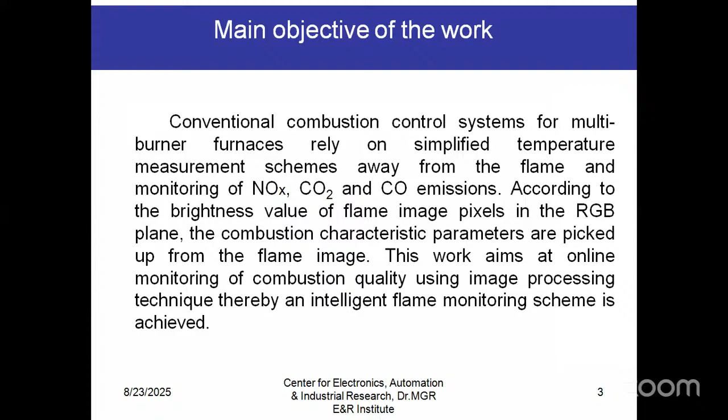We talk about the combustion characteristics. Based on the combustion characteristics, we infer the flue gas emissions and the flame temperature. This work will enable you to automate the monitoring of combustion quality using image processing techniques and an intelligent flame monitoring scheme.

What is the motivation? The main motivation is to ensure complete combustion. How do we go about that? I need to adjust the air to fuel ratio. The nominal value of the air to fuel ratio in a thermal power plant is 4:1, that is 4 parts of air to 1 part of fuel. So I must ensure complete combustion by adjusting this ratio.

This is done manually, there is no automated system. The air fuel ratio has some variation. The process engineer has to give a command to adjust the supply of fuel and air. So this is what is happening.

In the case of incomplete combustion, this can be identified by looking into the flame color. Actually, complete combustion and incomplete or partial combustion can be identified by looking at the flame color. So now I need to monitor the flame color.

When there is variation in the flame color: if it is whitish to yellow, you can say the combustion is complete. If somewhat reddish, it is partial combustion. And if the flame color is blackish, the combustion is incomplete. The flame appears blackish because of the presence of unburnt carbon.

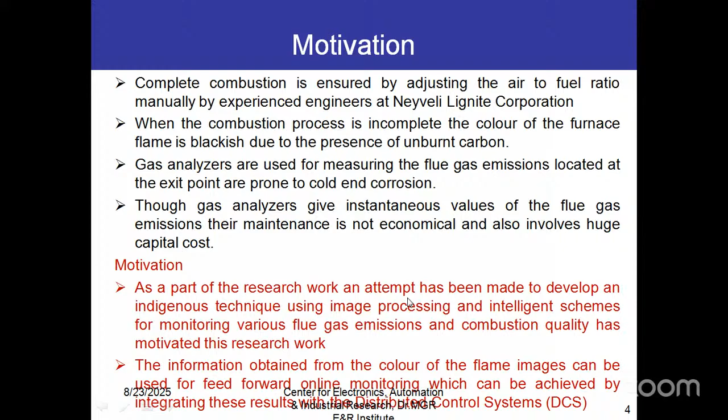Coming to the next slide, based on the literature survey done, people have worked extensively on this area. They are using soft sensors for measuring nitrogen oxides and oxygen using genetic algorithms, and they are using pattern characterization for the combustion flame so that they can estimate the combustion quality.

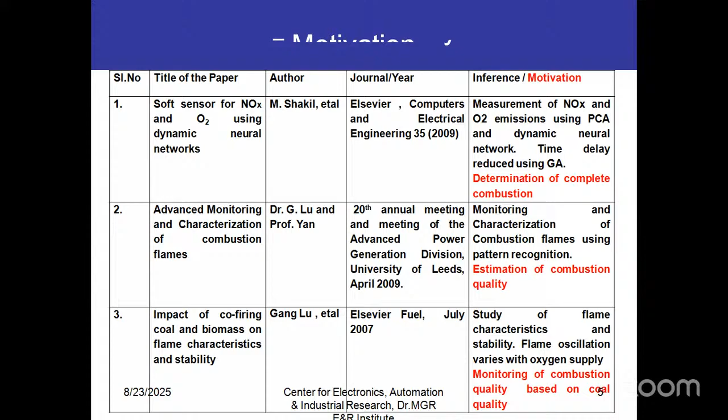People are also studying flame stability characteristics—the flame flicker. This flame flicker varies with respect to the oxygen supply. If the air fuel ratio is 4:1, the flame will burn stably. But if the oxygen content is less or high, there will be oscillations in the flame, and when there is flame oscillation, the combustion quality will be reduced. This flame oscillation and stability will once again depend on the coal quality given as input for firing.

Some people have used a hidden Markov model to identify combustion quality, along with three-dimensional visualization patterns. Using the back projection method, they try to reconstruct the 3D model of the flame, and from that they find the luminosity and infer the combustion quality.

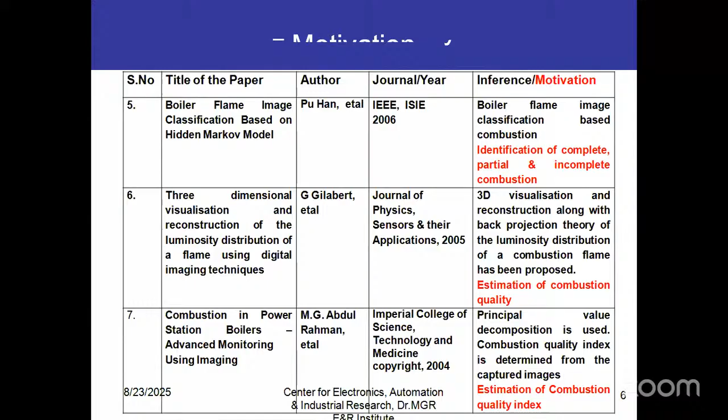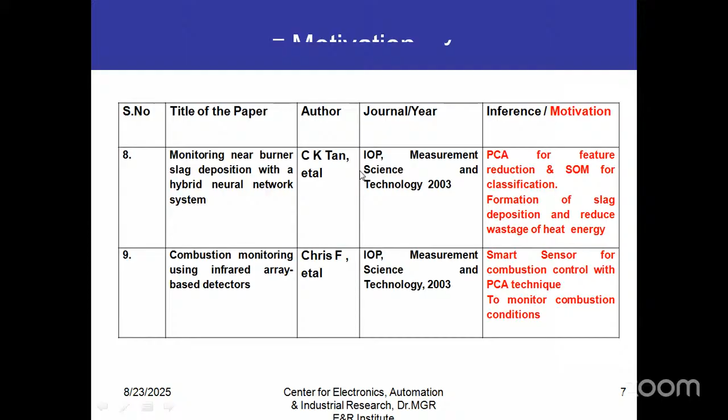Similarly, people are using principal component analysis to determine the combustion quality index from the flame image. Principal component analysis can be used for reducing features, and you can use a hybrid neural network system for classifying the quality of combustion. In the last paper, they are using a smart sensor system for combustion quality control using principal component analysis.

Before the pulverizer, you have grinding mills, which grind the uneven lumps of coal into fine powder. Since the coal is taken from the Earth's surface, it contains some metallic components, which need to be removed—you require only pure coal dust for combustion in the furnace. So the powdered coal is passed through a precipitator containing an electromagnetic field, wherein the magnetic field attracts all the iron particles, leaving the coal dust, which is a non-magnetic material, behind.

If you are using lumps of coal and directly dump them into the burner, the required amount of calorific value will not be attained, and burning of uneven coal lumps will take longer time. But if you use a pulverized coal mixture, the burning process takes place easily, and the firing process is very easy.

Combustion is defined as the process of burning fuel in the presence of oxygen. So you mix the coal with air and supply it to the furnace, and in the furnace you set the firing. Initially the firing is done using heavy oil, and subsequently the firing is taken over by the coal.

Once the coal is burnt completely, a lot of heat energy is generated. The preheated water inside the boiler gets heated by this energy and converted to superheated steam, at a temperature of around 540 degrees centigrade. This steam is used for driving the turbine coupled to the generator.

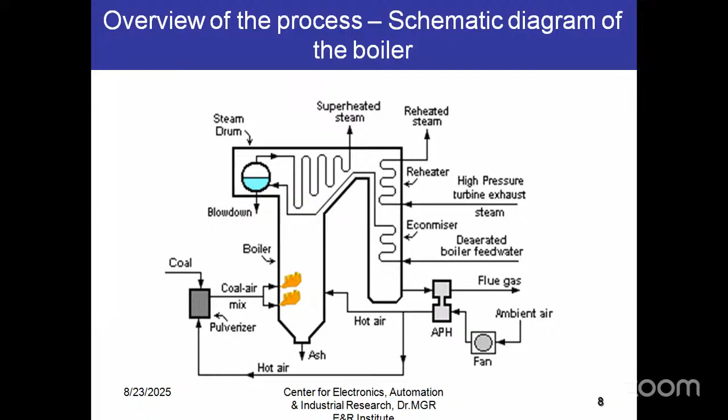By placing cameras, you can monitor the quality of combustion at the furnace level itself, ensuring complete combustion so that you can minimize flue gas emissions. This is the chemistry behind the combustion.

Now I'm mixing air with the coal, fuel and air are mixed. Fuel contains carbon, sulfur, nitrogen, and you have oxygen and nitrogen in air. This air combines with the fuel and is burnt, releasing heat energy as output. Oxygen combines with carbon and hydrogen forming carbon dioxide, carbon monoxide; nitrogen and sulfur combine with oxygen forming oxides of nitrogen and oxides of sulfur. This is the chemistry behind the formation of flue gases.

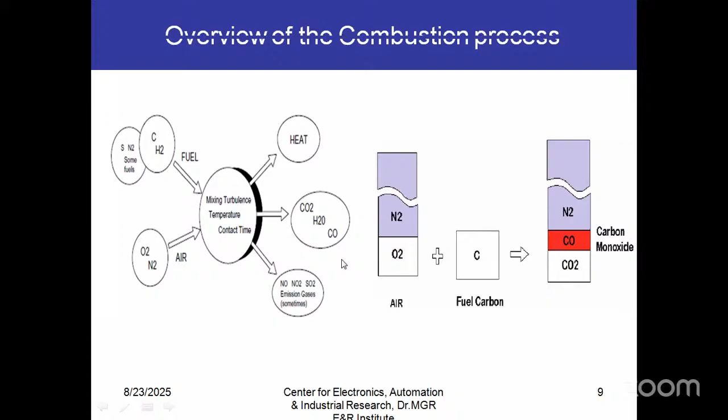This flue gas is to be minimized by looking into the flame color, so that we can ensure complete combustion. This is how we are trying to automate the industrial process, providing smart technology for minimizing flue gas emissions and ensuring complete combustion to achieve maximum power generation.

For doing this project, we approached Neyveli Lignite Corporation. If you see their specifications, the boiler capacity is around 690 tons per hour, and the fuel used is heavy oil and lignite. There are totally 6 mills grinding the coal.

The firing system followed is called the tangential firing system, and there are 2 units, each having a capacity of 210 megawatts generation. The superheated steam temperature is nearly 540 degrees centigrade, and the total number of burners is 20.

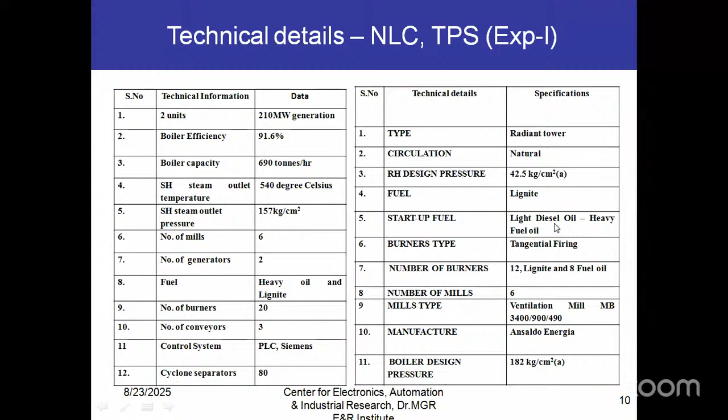There are 3 conveyor belts supplying the coal. Out of the 20 burners, 12 burners are for lignite, meaning coal, and the remaining 8 burners supply oil for initial firing. There are totally 6 mills, and the startup fuel used is heavy oil, which is light diesel oil.

This is the tangential firing system followed in the boiler. The entire height of the boiler at Neyveli Lignite Corporation is nearly 80 to 90 meters, and the entire firing process is completed between the 19th meter and the 21st meter of the boiler. At these 2 levels, the 6 mills are located.

You can see the 6 mills: A, B, C, D, E, and F. These mills are placed tangentially. OB stands for oil burner, and LB stands for lignite burner.

Then you have the BFD, burner flame detector. So you have one flame detector here, and you have the entry point for the lignite and oil. Then you can have additional air firing, that is AAF, which can be done to this point.

So like this, in the tangential manner, the system is arranged. Through the lignite burner, you supply the powdered lignite. Through the oil burner, you supply the heavy oil for initial firing. The burner flame detector captures the flame present in the furnace, and it displays the flame on the CCTV available at the control room.

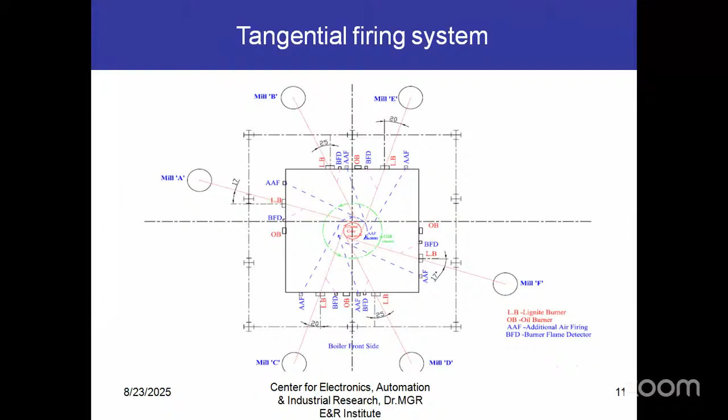This kind of firing takes place at two levels, that is the 17th, 19th meter and the 21st meter of the boiler. Now, for monitoring the flame inside the boiler, they are fixing infrared cameras, that is your burner flame detector. It is present at the 19th meter and the 21st meter, and it is being fixed to the walls of the boiler.

This infrared camera is perfectly cooled by a cooling system. It is placed inside a jacket. Inside the jacket, cooling water is circulated because the boiler temperature is very high. Actually, the flame temperature is very high, nearly 1250 degrees centigrade, so the camera will be affected by that.

So what you need to do is cool the camera. For cooling the camera, you provide a jacket outside the camera by which the cooling water is circulated, and you can change the orientation of the camera using some mechanism. There is a motor you can use, and this motor will adjust the orientation of the camera.

So currently, before this research, they were only using this camera for detecting the presence or absence of the flame. So only whether a flame is there or not.

Why they are using this system to detect the presence or absence of the flame is that you can't keep loading the furnace of the boiler without knowing the status of the flame. If you keep loading the furnace without knowing the flame status, the boiler will explode. The maximum capacity you can load the furnace is 690 tons per hour. That is the limit, you can't go beyond that.

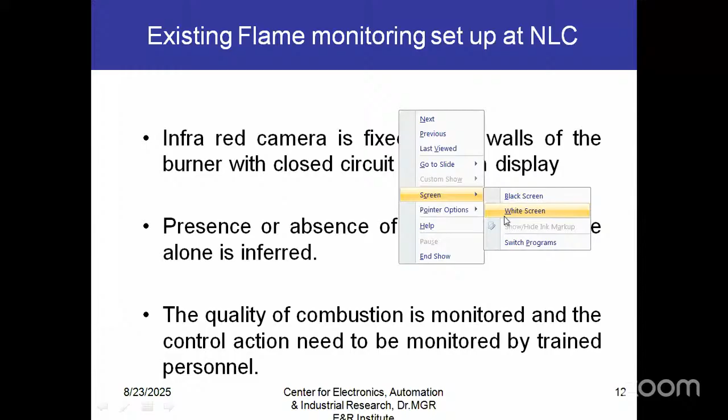For data gathering, you must be interacting with the trained personnel there so that you can offer the required control action with respect to the condition existing there.

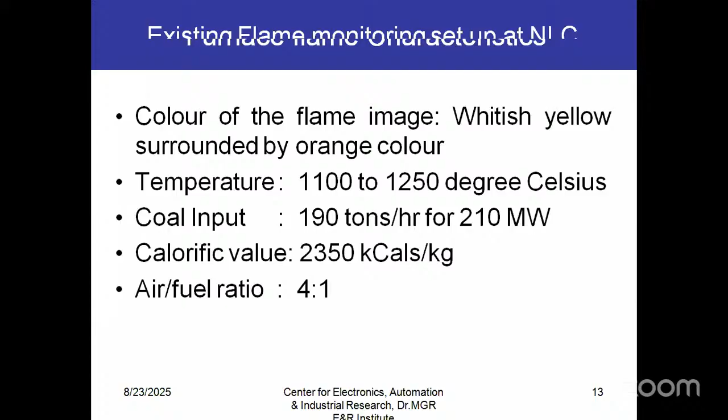So you see what the flame characteristics are. The color of the flame is going to be whitish yellow or orange. The temperature at the core of the fireball is nearly 1100 to 1250 degrees centigrade. The coal input is around 190 tons per hour for 210 megawatts, which is the capacity generation for one thermal power plant unit. The calorific value achieved is 2350 kilocalories per kg, and the air fuel ratio maintained is 4:1.

So in the existing setup, the infrared cameras are placed in a tangential manner to capture the flame. These infrared cameras take video of the flame and send it to the control room, whereby the process engineer will say whether the flame is there or not, and based on that they will be detecting and trying to say whether the flame is present or absent.

Based on that, they will say the flame is present or absent.

You can adjust the orientation of the camera using the servo motor mechanism, and the entire camera is cooled by circulating water through the cooling jacket, and whatever flame images are captured will be sent to the CRT monitor in the control room.

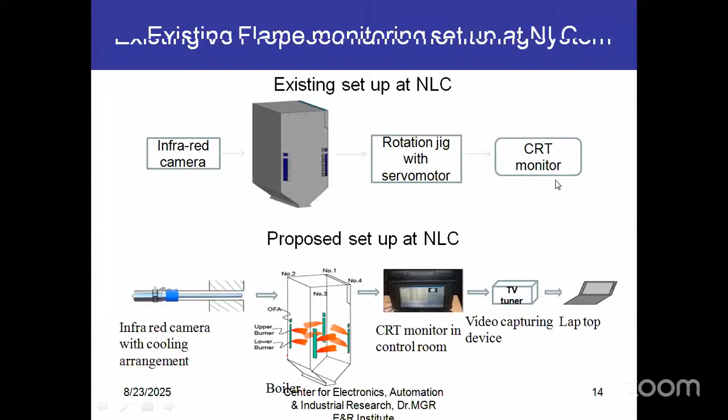But now what we are going to do is, whatever video is being captured on the CRT monitor has to be transferred to the PC, that is your personal computer or laptop, and in the laptop you can have your intelligent algorithms.

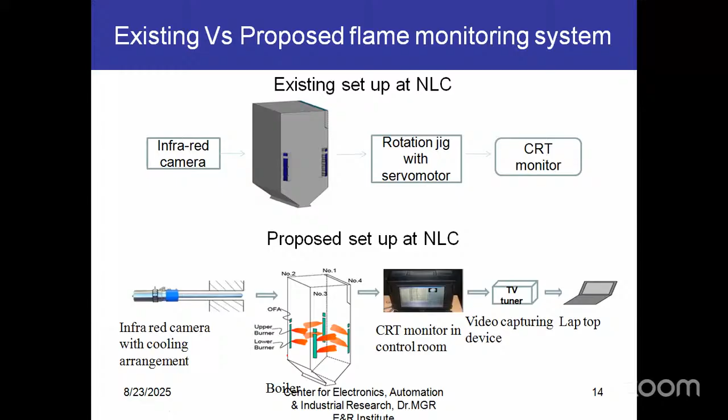You can process the flame images, and based on that you can say what is the quality of combustion and what will be the flue gas emissions. You can predict the flue gas emissions by looking into the color of the flame.

So this is the methodology that is being adopted. We are capturing the flame images, that is, the flame video is captured actually. So the flame video has to be converted into flame images.

So you are using a frame grabber to extract the flame images, and the flame images are pre-processed. Suppose any noise is there, it has to be pre-processed, the noise to be removed.

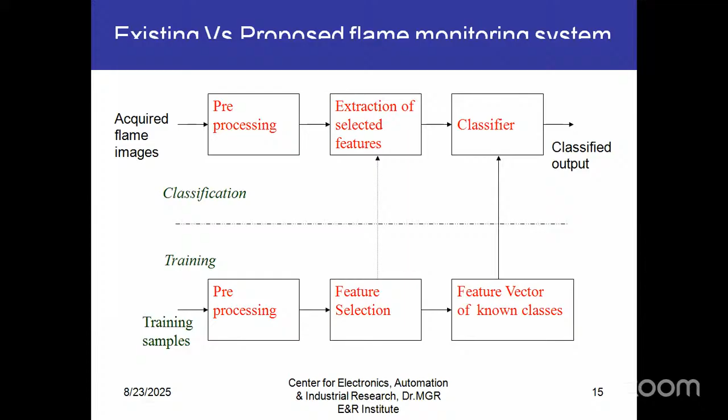After the noise removal, you try to extract the features from the flame image and give it to the classifier. Probably the classifier is an intelligent classifier, an AI which adopts some method of AI. Now when the features are given to the classifier, suppose you are extracting 100 features, you can give all 100 features to the classifier, but it will increase the computational complexity.

So what you can do is, during the training process, after extracting the features, you can go for feature selection. Which are the features which will enable the classifier to perform well? Those features alone can be given as input to the classifier, so that your classifier efficiency increases.

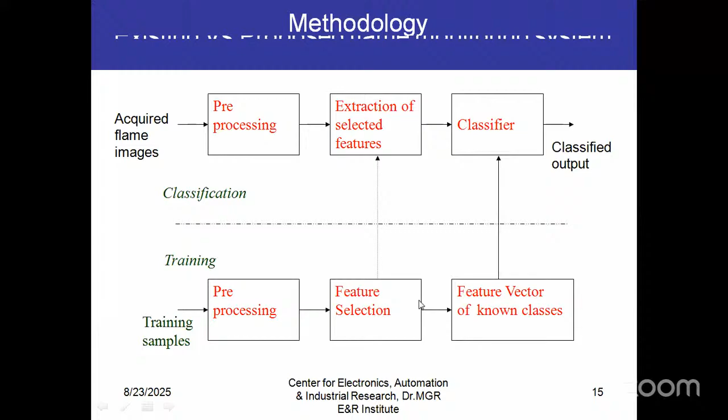So this is the general block diagram behind implementing the AI algorithms for flame monitoring.

So now what I have done is I have implemented the radial basis function network, back propagation algorithm, all this. So I am reading the flame images, and from that, features are extracted.

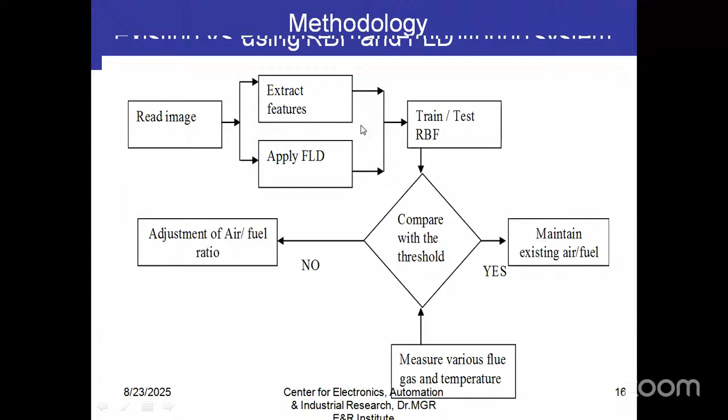For extracting the features, I'm using Fisher linear discriminant analysis. By using the FLD, I am trying to reduce the feature set. The reduced feature set is used for training the radial basis function network.

So the output of the radial basis function network will be compared with the threshold. If it is within the limits, if the variation is within the limits, then you can maintain the existing air fuel ratio, saying that the quality of combustion is complete.

In case if this air fuel ratio is not within the limits, then you have to go for adjusting the air to fuel ratio. At the same time, when you are comparing the threshold, you can also go for measuring the flue gas emissions and the temperature, which will say whether the combustion is complete or not.

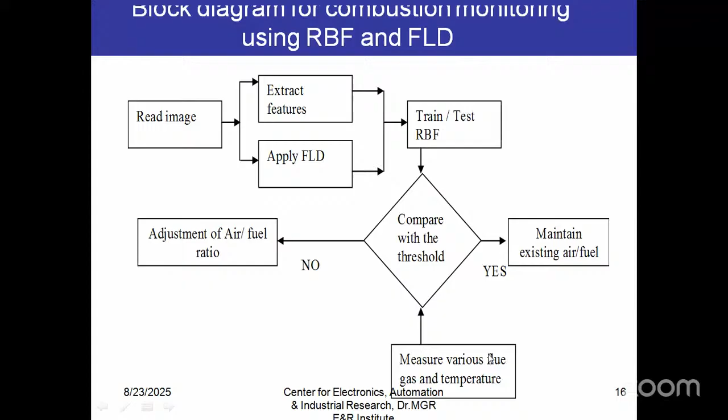So what are the steps that you need to follow? You have to collect the flame images. So we have taken the real-time flame images from Neyveli Lignite Corporation.

Then we are going to adapt some pre-processing methods. Actually, the image which we got is not a square image, so we go for square image extraction. Then we followed noise removal, and also edge detection and histogram analysis was carried out.

Then some features like area, average intensity, orientation, centroid, etc. were extracted. And then we tried with the classification schemes, both intelligent, that is AI schemes, as well as the conventional schemes, and we try to predict the combustion quality and the flue gas emissions.

So these are the flame images pertaining to the three categories. Class 1 corresponds to the complete combustion category, class 2 corresponds to partial combustion category, and class 3 corresponds to incomplete combustion category.

In the incomplete combustion category, you can see that the flame color is black, because of the presence of unburnt carbon. For complete combustion, it is yellowish and whitish, but for partial combustion, it is somewhat reddish.

So correspondingly, by capturing the flame images under these three categories, the flue gas emissions will be noted down by the measurements from the gas analyzer, and this will be formed as a lookup table.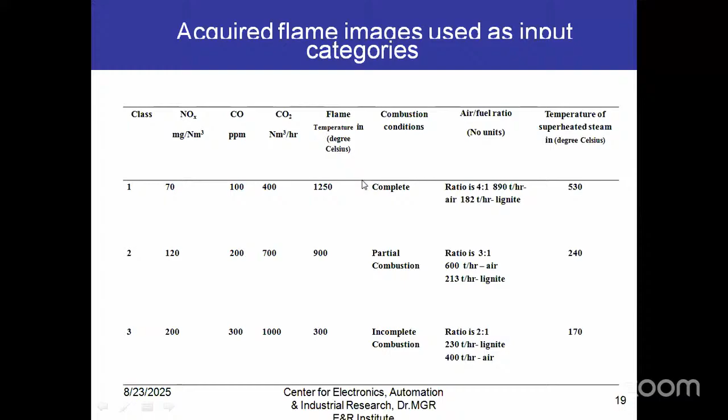Okay, now from the flame images, correspondingly we have captured the values of the flue gas emissions - NOx, CO, CO2, flame temperature - all this with the air fuel ratio. And at that time, the steam temperature was also measured. So with this table and the flame images, we start proceeding with our work.

The flame images, captured from the furnace of the boiler, pertain to three different combustion conditions. The size of the original image taken is 47 by 35, and we have gone in for square image extraction, that is 30 by 30.

This was done to determine which 30 by 30 portion to use. For that, a histogram analysis was done to find out which portion of the image can be used, and if any noise is there, you can use median filtering to remove the noise.

Edge detection was also done for all three groups of images - class 1, class 2, class 3. Class 1 corresponds to complete combustion, class 2 corresponds to partial, and class 3 to incomplete.

You see the majority of the flame is whitish or yellowish in class 1. In class 2, nearly 70% is blackish. And in class 3, almost 95 to 97% it is fully black.

And we have tested various filtering techniques - variance filter, minimum filter, mean filter, median filter. Out of all the filters, we found that the median filter was able to give the peak signal to noise ratio at an optimum range of 63 dB.

Now we have done the combustion histogram analysis to find out the range, minimum value and maximum value of the pixel range. In the complete combustion category, the minimum pixel intensity value is 120, and the maximum intensity value is 255.

In the partial combustion category, the minimum intensity value is 31, maximum is 255. So the count of the number of pixels corresponding to 255 will be less. But in the case of complete combustion category, the number of pixels corresponding to the intensity of 255 will be many in number.

So if you take the mode for 255, it is 67,368. Whereas for the partial combustion, it is only 60,934.

Similarly, for the incomplete combustion towards the intensity of 255, there are no pixels at all. So the minimum value is 0 and the maximum value of the intensity itself is only 75.

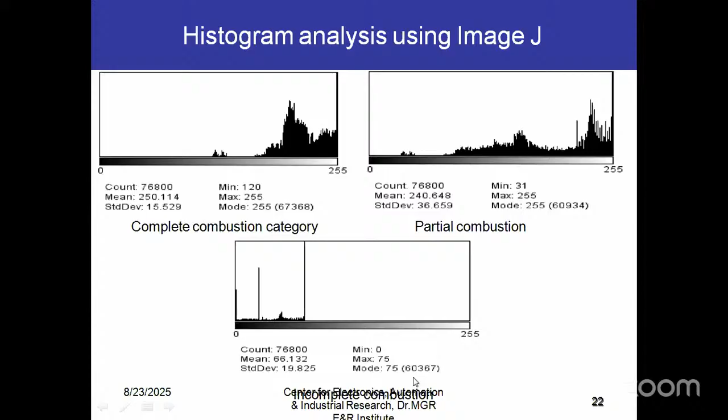You see only the mode for the 75 - the mode is computed only for the intensity value 75. So the pixel values in the range of 75 are having a mode of 60,367.

Now a surface plot has been carried out. From the surface plot, we are able to find out that the maximum portion of the surface is towards 255 for the complete combustion category.

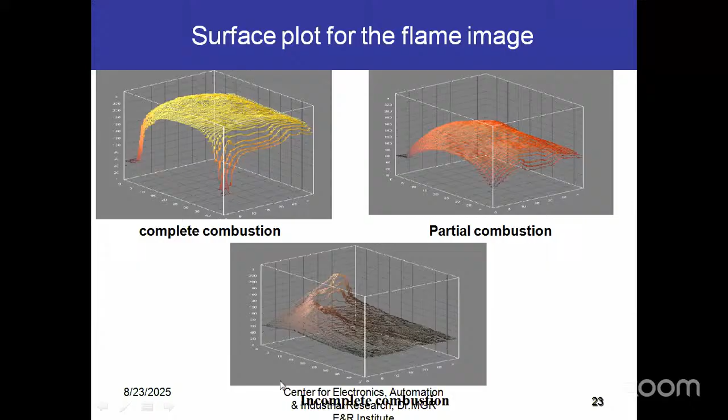For the partial combustion category, the entire surface is somewhere in the middle range of nearly 160, 170 and so on. And for incomplete combustion, the entire surface falls in the range of 0 to 75.

Now we can go for computing the features. So we are taking the average intensity value, area of the high temperature flame - which portion of the flame is having high temperature, that area alone is considered. Then centroid of the flame about the x direction and centroid of the flame about y direction, and orientation.

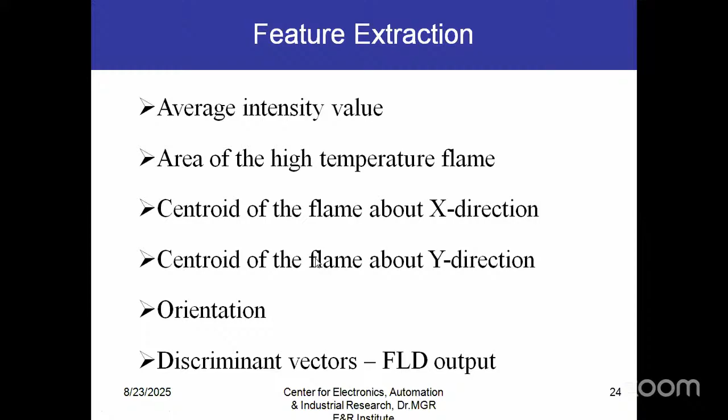So we have collected almost 51 images pertaining to 3 categories. We computed the average intensity. For computing the average intensity, you have to first find out the average of the gray level of the pixels in the flame.

Then you have to apply the first threshold value. You find the brightness of the flame. Then after computing the brightness of the entire flame, you try to compute the brightness of the high temperature region in the flame.

For that, you find out what is the average gray level of all the pixels, and you have to divide that value by the second threshold value. Then you compute what is the area of the high temperature flame.

So you find the summation of the brightness of all the pixels minus the threshold to get the area of the high temperature flame. Then you find the rate area of high temperature flame using this formula, and you can stop the process of feature extraction.

Once feature extraction is done, you go for FLD because you want the discriminant vectors from the FLD. For computing the FLD, you read all the 51 images. You have to find the eigenvectors, and locate the diagonal values which correspond to very high values.

Then you are finding the class mean. That is, when I say you are having 3 classes, class 1, class 2, class 3, for each class you are finding the mean value. Then you are finding the global mean, that is one common mean for all these 3 classes.

Then you try to find the within-class mean. That is, what is the mean within class 1, what is the mean within class 2, what is the mean within class 3. So when I say class 1, class 2, class 3, it corresponds to

complete combustion, incomplete combustion, and partial combustion. Then, after computing all these means, you compute the discriminant vectors phi1 and phi2, which will serve as 2 more features apart from the average intensity, high temperature flame, centroid X, centroid Y, orientation. Apart from that, you add two discriminant vectors obtained from this FLD analysis, and this will be given as the input to the classifier.

Now, when you are doing the FLD analysis, you can see that it is also done to find whether any overlapping between the images is there, because when the flame is burning, the transition will be from complete to partial and partial to incomplete. When that is the case, during the capturing of images, some partial images would have been mixed up with the complete combustion category and incomplete combustion category. If that is the case, you have to eliminate all that, then only your classification efficiency will improve.

So for that, we have computed the centers for class 1, class 2, class 3 from FLD analysis to see that any overlapping between them is there. But when you have carried out the computation for the centers using FLD analysis—

that is, actually the size of the image is 47 cross 35, and in that you are only taking 30 cross 30. So you have tried this for various 30 cross 30 combinations and computed the centers for class 1, class 2, class 3 using the FLD analysis.

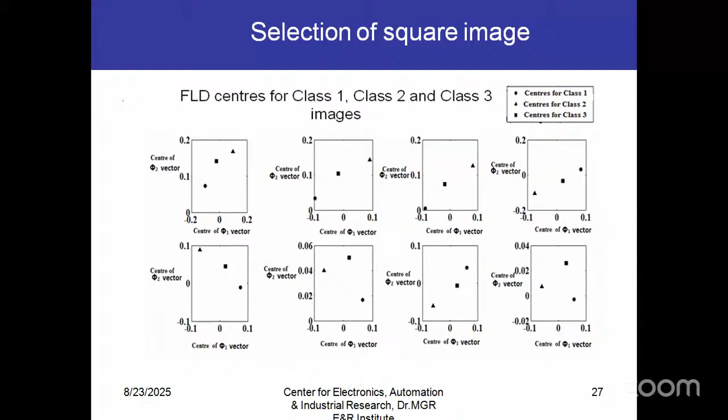And in all the cases, you found that there is a distinct separation between the class 1, class 2, class 3 images, which states that you can take any 30 cross 30 size of the image for further analysis. So now the flame image which you are capturing is a color image actually.

So you have to do the analysis in the three planes. A color image will have intensity in R plane, G plane, B plane. All this put together constitutes a pixel value. So in which plane can you do the analysis?

From these three figures, you can see that in the R plane, if I do the analysis, it will be efficient. Why? Because group 3 is grouped together, group 1 is grouped together, and group 2 is also grouped together, except only two images.

In the G plane, it is also somewhat efficient. All the group 3 images are together, group 2 images are together, and group 1 images are together. But B plane is not suitable.

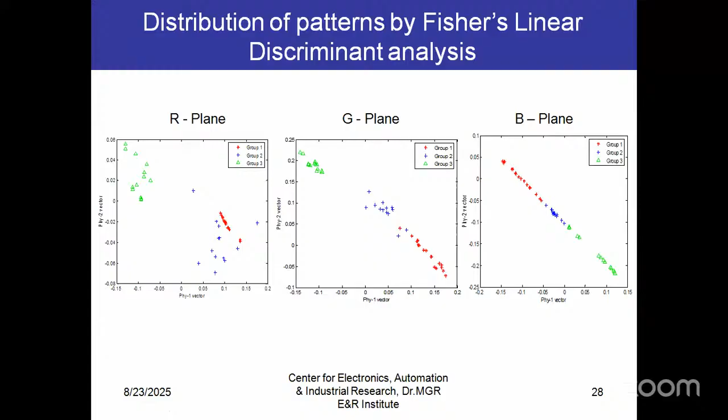So you can do your analysis either by combining the intensity values in R plane and G plane, or you can separately take the intensity values in R and G plane and do further processing. So by extracting the features, we went in for the conventional classification, the Euclidean distance classifier, which we tried first. When using the Euclidean distance classifier, the number of misclassifications was very high.

That too in the third category, which corresponds to incomplete combustion. The second category, partial combustion, the number of misclassifications are very high, 17 and 8. So our aim is to predict the incomplete combustion and the partial combustion, and offer the required control action. By using the Euclidean distance classifier, the classification is not up to the mark.

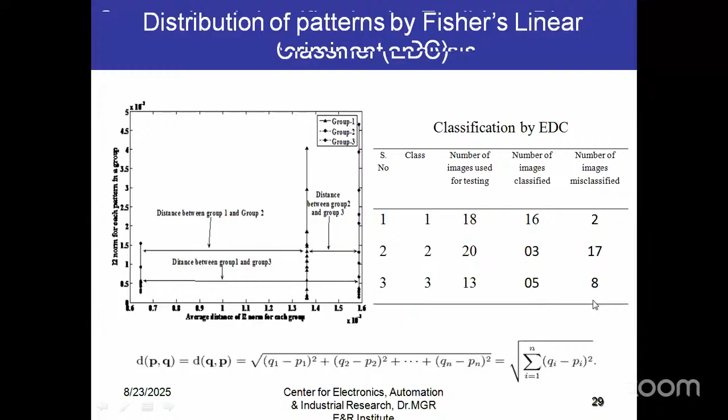The misclassifications are very high in number, so we move on to the intelligent classifier techniques. Take the Fisher linear discriminant analysis also. In this case also, three images are getting mixed up. In category 1, one image is misclassified, and in category 2, two images. Category 1 is complete combustion, category 2 is partial combustion. So three images are misclassified.

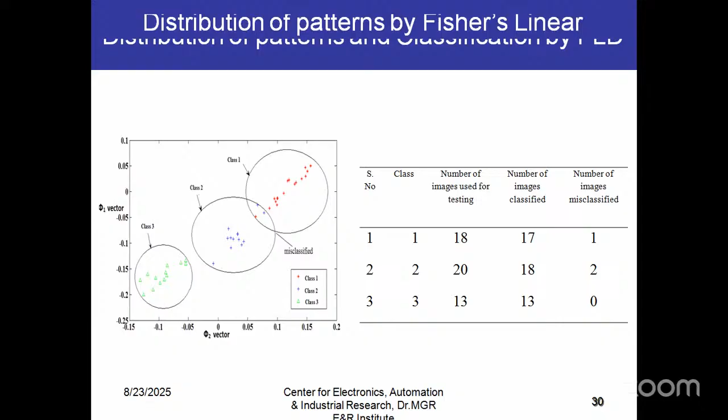That is why we are using the discriminant vectors of the FLD analysis as two features for training our intelligent classifiers. These discriminant vectors are dependent on the within-class mean and between-class mean and so on. Now we are proposing the feed forward network, that is the radial basis function network, first.

We have taken 7 nodes in the input layer, 48 nodes in the hidden layer, and 6 nodes in the output layer. Number of training patterns used was 51, and during the training process, a mean squared error of 0.033 was achieved. We are using a Gaussian function as the activation function in the hidden layer and a linear activation function in the output layer.

7 features were used as input to the RBF. What are the 7 features? Area, average intensity, area through the equation (the high temperature flame we computed), centroid X, centroid Y, the rate area of high temperature flame, and orientation. These are the 7 features which we have taken.

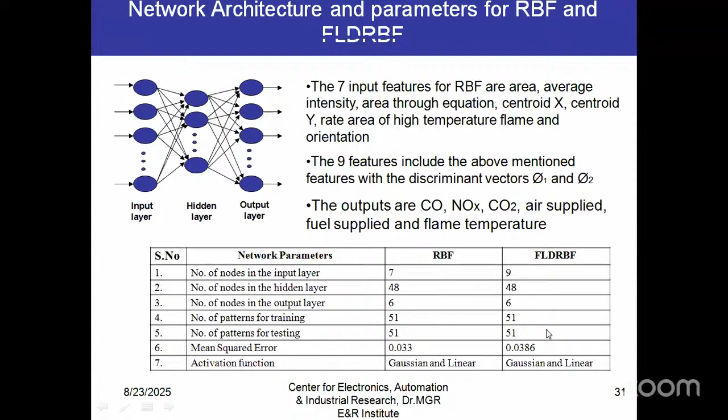Based on these 7 features, we computed the efficiency of the RBF. We also added 2 more features, phi1 and phi2, from the FLD. Along with the 7, these 2 features were put together, and totally 9 features were used for training the RBF. We try to make a comparison between the RBF and FLD RBF to prove which one is highly efficient.

So these are the various outputs for the FLD RBF, corresponding to the flame temperature, CO emissions, NOx, carbon dioxide emissions, and so on. Only 2 images are being misclassified, in class 1, the complete combustion category. This corresponds to the air supply, sulfur dioxide, and then coming to the combustion quality and so on. The 2 images only were misclassified in the first class.

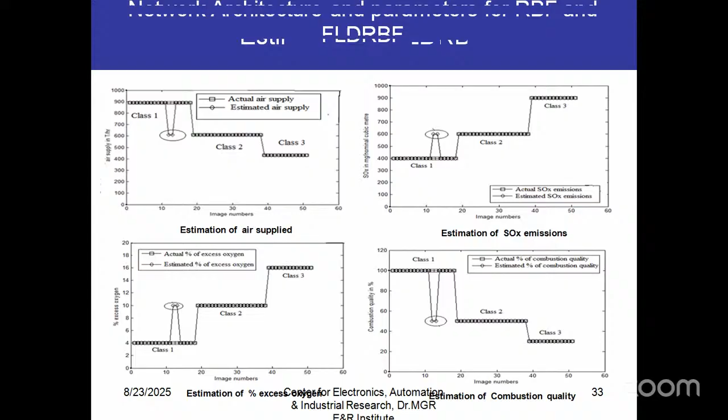When you combine the feature from FLD along with the original feature set, and train using RBF, that is the FLD RBF, only 2 images are misclassified. But when using 7 features for the RBF classifier, you see in class 3 many images are misclassified. What is class 3? Incomplete combustion. So in the incomplete combustion category, which is the crucial one, many images are misclassified.

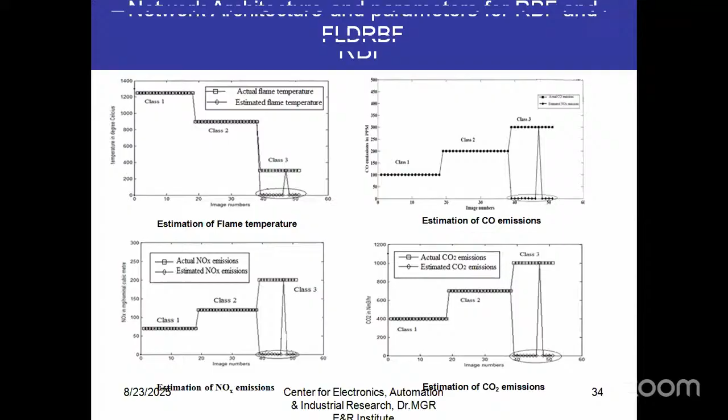So what we try to do is improve the classification efficiency of the RBF. We added the discriminant features from FLD along with the conventional 7 features to improve the classification efficiency of the RBF, which was discussed in the previous slides.

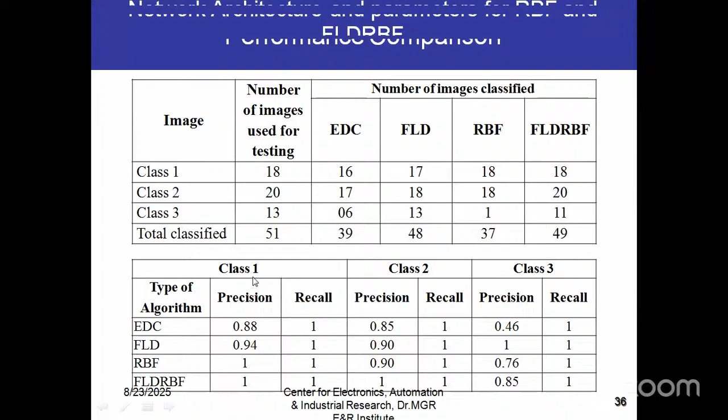This is the comparative analysis that is made: Euclidean distance classifier, FLD, RBF, then FLD plus RBF. You see the maximum number of images are being classified correctly when using FLD RBF. Also the performance measures like precision and recall were maximum using the FLD RBF.

So that's what made us go in for analyzing the color of the flame image and automating the entire system to identify the combustion quality and minimize the flue gas emissions. Here we try to propose an indigenous technique for monitoring the flame color, and we proposed a system to minimize the flue gas emissions, and we are trying to save the gas analyzers from cold end corrosion. So you can do this measurement of flue gas emissions in an online manner by using these intelligent algorithms, using a feed forward control strategy.

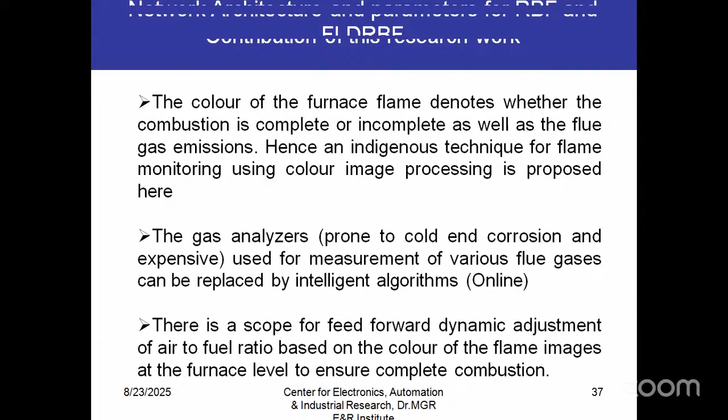So in feed forward control strategy, you can minimize the time for getting the measurements, and based on the flame color, you can adjust the air fuel ratio to ensure complete combustion.

This also comes under a class of inferential scheme, because you are trying to infer the combustion quality from the flame color. So you're using a ratio control, controlling the air to fuel ratio, by looking into the flame color.

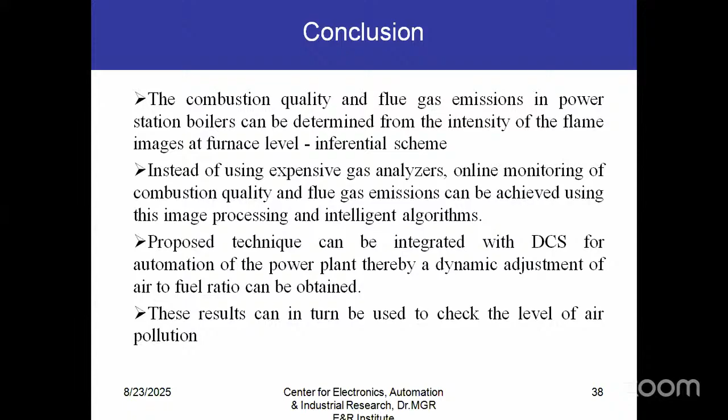You are offering an inferential scheme because you are trying to infer the value of the combustion quality, whether it is complete, incomplete, or partial. Then you're offering a feed forward control by looking into the flame color itself, adjusting the air fuel ratio to ensure complete combustion and minimize flue gas emissions.

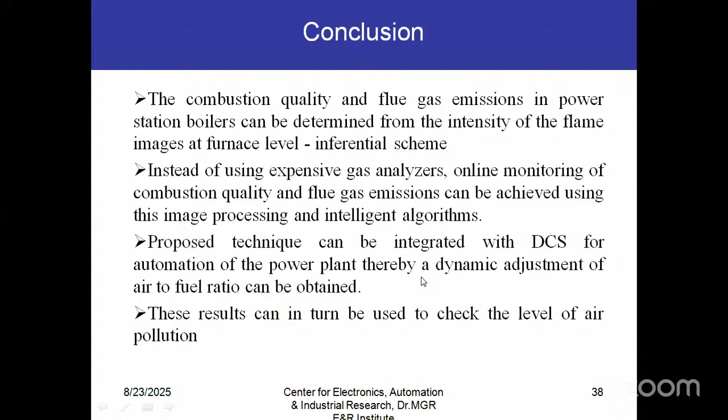You can use these results for dynamic adjustment of the air fuel ratio. You require flame images for three different categories, and you can extend the work by including intermediate combustion conditions like less partial, highly partial, less incomplete, highly incomplete, and so on, to increase classification efficiency.

Real-time integration is possible when you embed all these algorithms into DCS, and you can do online monitoring. Instead of manual adjustment, you can monitor from the control room to provide a cost-effective solution for minimizing flue gas emissions.

This work was supported by engineers from Neyveli at that time, Thiru Gautaman, Ramakrishnan sir, and Shaktivel sir. Ramakrishnan sir played a key role in capturing all the data, and they extended their valuable support for gathering the data for us.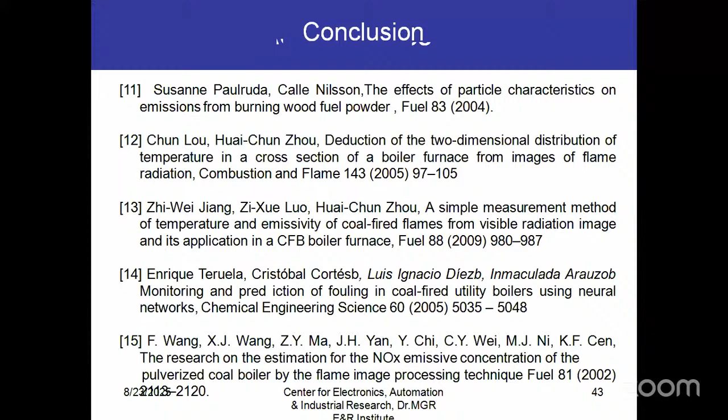So these are the references which we have followed. This is one part of the research. I would also try to discuss the next one, as I have to continue up to 3:30.

I will go for the second application. I will share another PPT, wherein I will be monitoring the quality of the steel sheets.

I'm using a smart system for automating the steel processing factory to detect defects on the surface during the processing of the steel sheets.

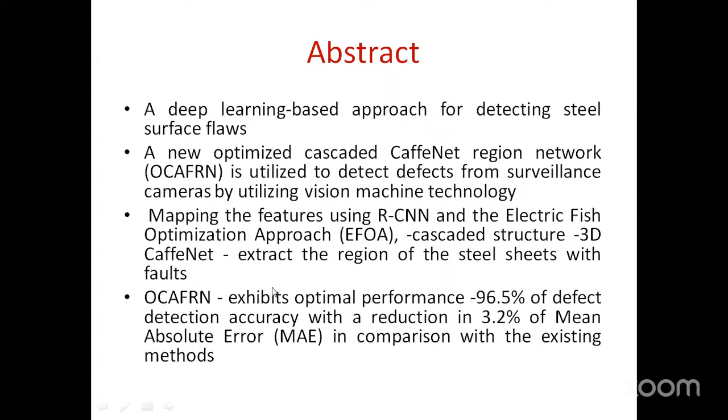Why? Because during the processing of steel sheets, the temperature is very high. You can't go and touch the steel sheet as such.

So you can have a camera to capture the images, capturing the video during the fabrication of the steel sheets. When capturing the video, the images obtained will be low resolution, and from that low resolution image you need to infer the flaws appearing on the surface of the steel sheets during the manufacturing process.

For this we have used an optimized cascaded CaffeNet region network for classifying and detecting the defects. We are also using convolutional neural networks with electric fish optimization approach for detecting the faults in the steel sheets.

Finally, we have evaluated the performance of the proposed model using the defect detection accuracy and mean absolute error, and so on.

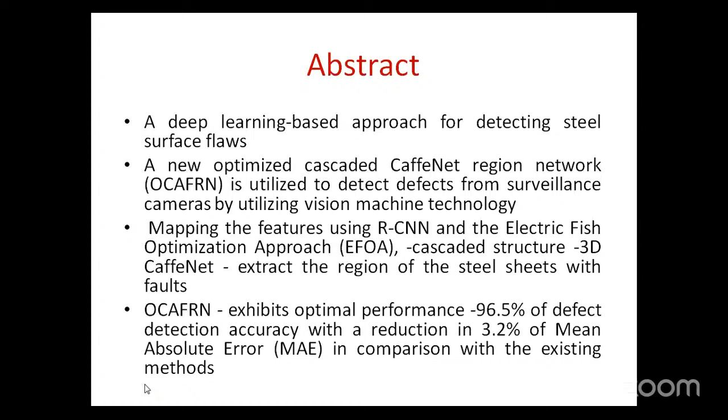So when you go for the introduction, you see there are a lot of imperfections. They include scratches, holes, scars, and so on.

Can you see my screen actually? Yes ma'am, before it was visible. Now it's not visible. Okay, now. Yes ma'am, it's visible now.

So there are a lot of imperfections like scratches, holes, scars, and so on. Totally, we have taken 4 defects for making the study.

When you are able to identify this kind of defects during the processing itself, you can go for producing high quality steel sheets without any defect.

At present only manual methods are there, so you try to automate the entire system using machine learning algorithms, so that you can identify the defects online during the fabrication itself. For this purpose we are using convolutional neural networks.

So what are the research highlights? We are going to detect the defect online itself. We are using AI-based methods for feature extraction. Then classification of the defects is done using CNN, hybrid KNN, SVM, and so on. We are trying to obtain an optimal accuracy rate.

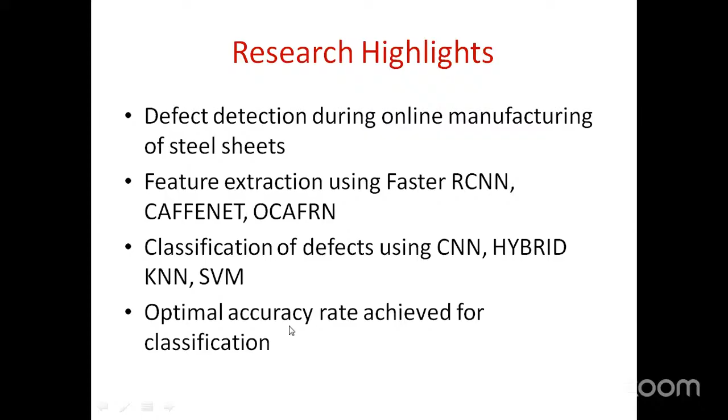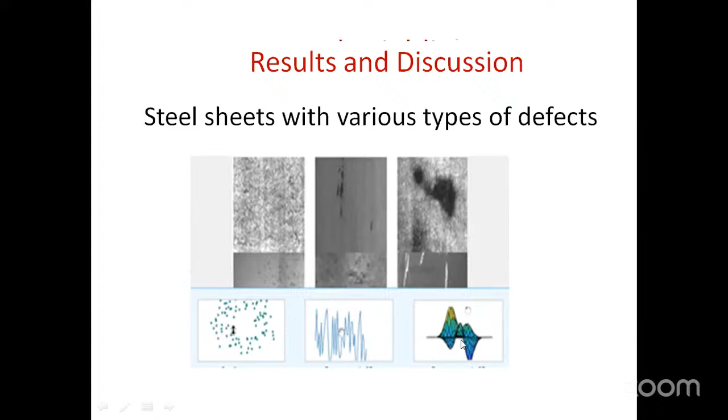If you see the results, these are the various types of steel sheets under processing, and we are identifying the defects. This is done online, so you are able to capture the defects and obtain a surface plot based on the defects existing on the steel sheets.

During the training process, the accuracy we try to achieve is very high. Maximum amount of accuracy was achieved to detect the defects. The defects were also spotted out using boxes to indicate the defective areas on the steel sheets.

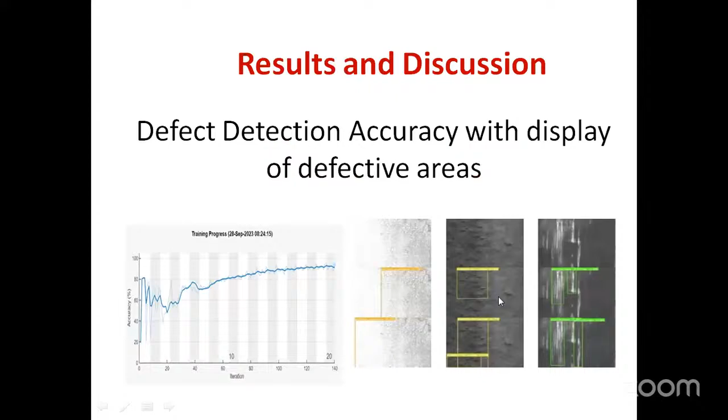We have adapted the feature extraction methods, that is faster RCNN, CaffeNet model, and OCA-FRN model. We found that during training, testing, and validation, the OCA-FRN model was able to give the maximum accuracy for detecting the defects.

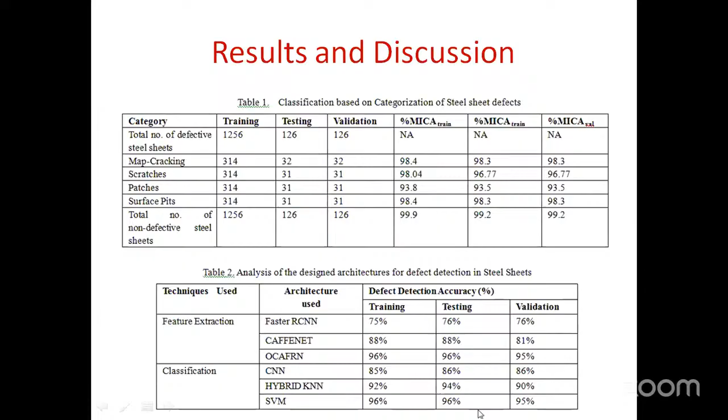Then in the classifier, three classifiers were proposed: CNN, hybrid KNN, and SVM. Among these, the SVM model was giving the maximum classification accuracy for detecting the defects in the steel sheets.

This study introduces an OCA-FRN model for detecting defects in steel sheets, and four different types of defects were analyzed. These defect images were captured under various lighting conditions.

LED lightings can be used. Normally in steel sheet processing industries, factories are constructed on a huge land area with high ceilings, so the light distribution patterns will be different.

You can use linear luminaires, high bay lights, task lighting, and so on. This model will help you tell which kind of lighting is suitable to detect the flaws during the manufacturing of steel sheets.

This OCA-FRN model was able to process low resolution images to detect the flaws that were available. Any missed detections and imprecise localization can also be monitored and detected using the OCA-FRN.

This algorithm performs well with maximum accuracy, thereby detecting the defects on the steel sheet surface.